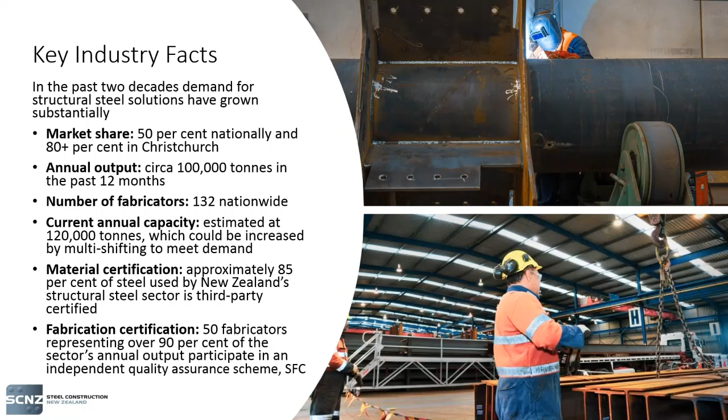We're also pleased to report that over 85% of the material supplied in New Zealand is third-party certified, so you have increased confidence that the steel put into a project meets the requirements of the standard. At this point, I'd just like to hand over to Alistair, who will be introducing the topic today and covering various aspects of it. So thank you, Alistair.

Well, thanks for the introduction, Kevin. Welcome everybody, hopefully we won't have any more technical glitches today. I'd like to begin by giving you a little bit of an outline of where we're going to go in the next 40 minutes or so. Firstly, by way of introduction, I want to answer the question: why are we proposing new material requirements for Category 3 members?

Then we'll talk about steels for seismic application, and what are some of the factors that impact the performance of steels for seismic applications. We'll then talk a little bit about the NZS 3404 material selection criteria for seismic applications. Really the heart of the presentation is the section on what we're proposing for Category 3 member material requirements, and we'll also touch on the technical basis.

So why do we think these are sound solutions, or appropriate, for Category 3 members? Then we'll talk a little bit about what are some of the implications of the requirements. If we do adopt them, what will be some of the benefits, and what are some of the next steps. The game plan for developing this draft paper is to make some changes to the NZS 3404 material selection provision, so what are some of the next steps on that journey?

What we're going to talk about today is based on a Steel Advisor article that we published recently. It's available from the SCNZ website, and hopefully most of you have had an opportunity to download the paper. I'll be giving a high-level overview of the paper and then really focusing on what we're proposing. If you want to see all the details of what's in the paper, then you'll have to go and read it.

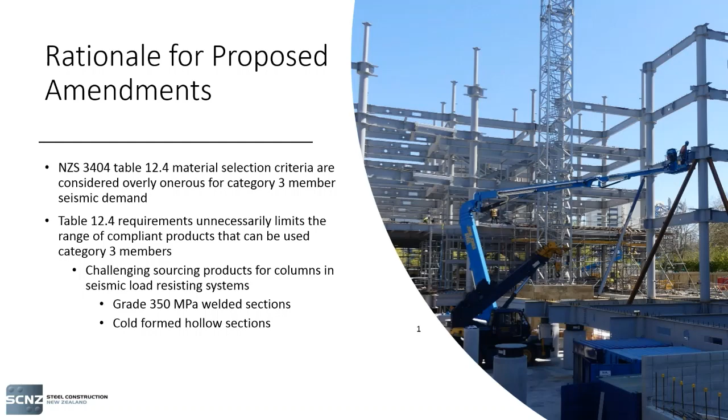What I'd like to do now is talk briefly about some of the factors that affect the performance of steel in seismic events. The Northridge and Kobe earthquakes in the 1990s exposed the fallacy that structural steel is an inherently fracture-resistant material. There were two types of fracture modes observed during those earthquakes.

Firstly, there was brittle fracture. To understand it, if we were to pull a test sample, put it in a tensile test machine, and plot stress versus strain, we can contrast brittle and ductile behaviour. With brittle type behaviour, once the steel reached its elastic limit, we would get very little plastic deformation before the material fractured.

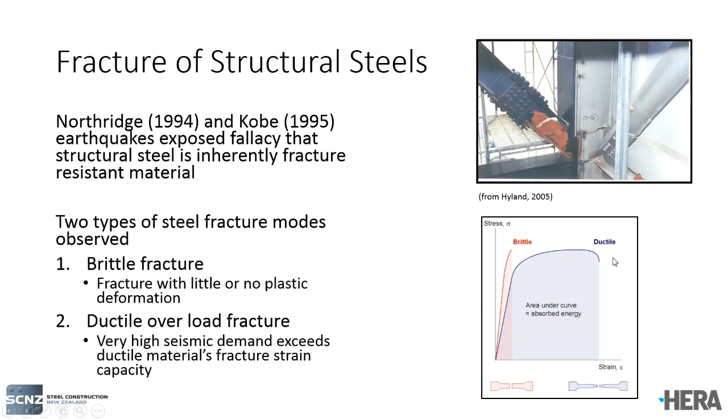In contrast, ductile behaviour means that once steel reaches its elastic limit, it transitions from elastic to plastic behaviour, with significant plastic deformation before the material eventually failed. The second fracture mode observed in those earthquakes was ductile overload fracture, which, as the name suggests, was actually very ductile. What happened was the seismic demand was so high that it exceeded the fracture strain capacity, so we ended up somewhere out here in the steel.

So what are some of the factors that contribute to the seismic performance of structural steels? The stress strain characteristics of the steel have a bearing on its performance, which we'll touch on in the next slide. The V-notch toughness of the steel also impacts its seismic performance, which we'll discuss in more depth later.

Other factors such as the presence of crack-like features in the steel can also affect seismic performance. Weld defects can introduce crack-like features, and you can get inclusions in steel that are rolled in during the rolling process.

Also, the loading parameters have an impact on the seismic performance of steel. The rate at which the structure is loaded has an impact on seismic performance, as does the number of cycles of inelastic demand.

Another factor that can contribute to the seismic performance of steel is the presence of triaxial restraints. If you have a very complex three-dimensional joint and the steel is essentially constrained from deforming, it will often end up behaving with a very limited ability to deform plastically.

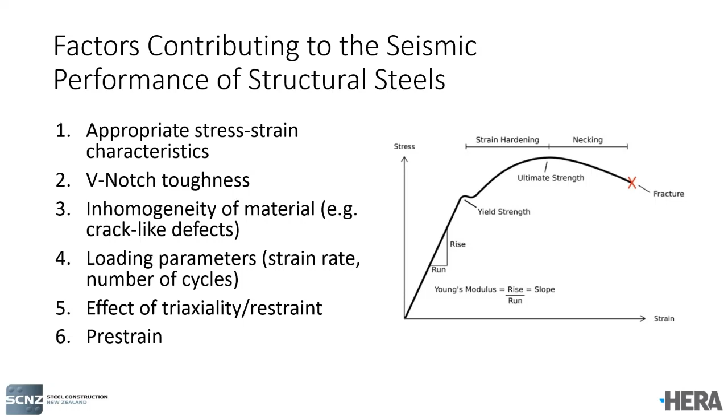Also, the presence of pre-strain in the steel can affect its seismic performance. If the structure has been through a previous moderate earthquake and the steel has been yielded, that will have an impact on its performance. The steel might have been pre-strained by fabrication processes, cold bent, or on site they may have had to force it to get it erected and into place, ending up yielding some of the steel.

So what are some of the stress strain characteristics of steels that contribute to good seismic performance? One key requirement, and a direct measure of the ductility of structural steel, is the elongation percentage at fracture value, derived from a tensile test.

The sample is then put into a tensile test machine, and we get this sort of behavior for structural steels. Once we start loading, we typically get elastic, recoverable deformation. We'll reach a yield point, then transition into plastic behavior where the steel continues to deform without additional stress. The steel then starts to strain harden, and eventually reaches the ultimate strength, the highest stress. Once we reach ultimate strength, the sample starts to neck down and eventually fractures. After the test is complete, the test sample is essentially put back together again.

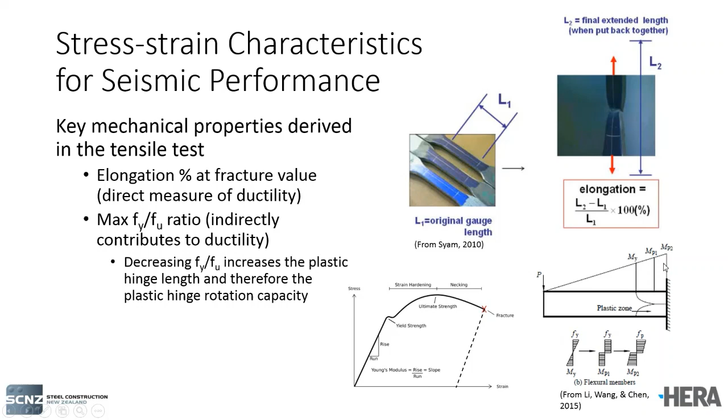All structural steels exhibit a change from ductile to brittle behavior as the temperature of the material drops. The Charpy V-notch impact test determines the amount of energy absorbed by a notched test sample during fracture.

The transition temperature is taken as the transition point between ductile behaviour of the steel and brittle behaviour, and it's typically defined as the temperature at which, if you were to test the sample, you would have 27 joules of energy absorbed. Above that transition point, it takes quite a bit of energy to break the sample. Once you get below that transition point, you require very little energy to break the test sample.

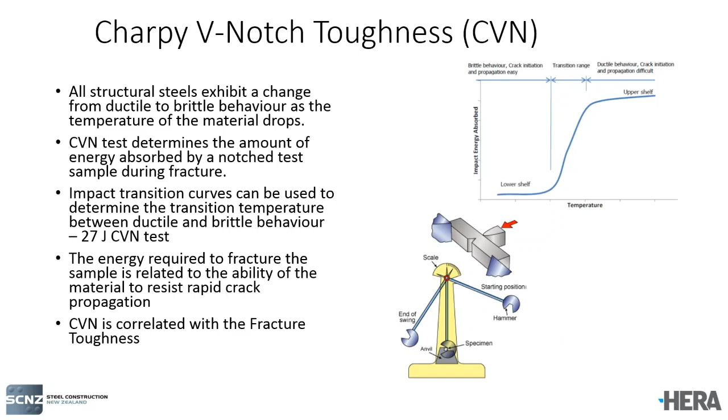So the energy required to fracture the sample is related to the ability of the material to resist rapid crack propagation or brittle fracture. And there are correlations that you can make between the Charpy impact energy and the fracture toughness of the material.

What I'd like to do now is talk briefly about the NZS 3404 material selection criteria for seismic applications. The NZS 3404 material provisions are intended to ensure that the grade of steel chosen can meet the expected inelastic demand, and that includes suppressing brittle fracture.

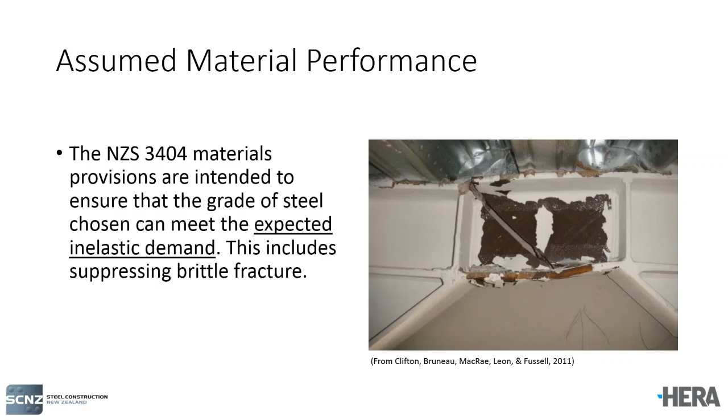So what is the expected seismic demand? NZS 3404 classifies seismic resisting systems into one of four categories based on the inelastic demand. There are three ductile systems: category 1, fully ductile with the highest inelastic demand, through to category 3, nominally ductile, which has very low inelastic demand, and then category 4, which are essentially elastically responding systems.

Members can also be categorized into primary or secondary members, depending on whether they are yielding elements or protected elements using capacity design. So in 3404, table 12.2.6 has a relationship between the structure category and the member category. This relationship is also a function of whether the member is a primary or secondary member and whether there's been capacity design.

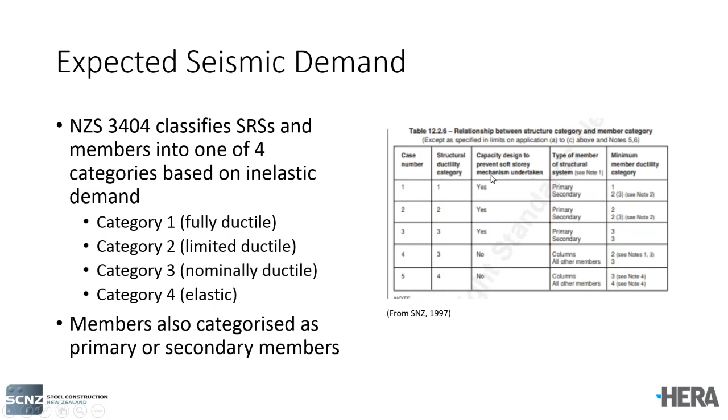Not surprisingly, the member seismic design demand is category dependent. So to illustrate the difference in demand between the categories, I have here an I section subject to flexural bending.

If we're talking about a category 4 member, which is essentially an elastically responding member, if we think about the moment curvature behavior of the steel section, we'd be talking about steels operating in this elastic portion up to the first yield of the section. At that point we have first yield, so the outer fibre of the steel has reached yield.

Category 3 members experience very low inelastic demand. They're subject to a strain of about 2 times the yield strain. So for category 3 members, we're now undergoing the transition from elastic to plastic behaviour. This is the sort of stress distribution we get for category 3 members.

Category 2 members have a fully plastic section, and the strain demand in the section would be in the order of about 10 times the yield strain.

Once we get to category 1 members, we are now seeing strain hardening, and we're getting strain demand in the order of about 24 times the yield.

So if we were to think about the flexural strain ratio between category 2 and category 3 members, it's very simple maths. It's a ratio of about 10 to 2, so it's 5 to 1. And for the category 1 members, it's about 12 to 1.

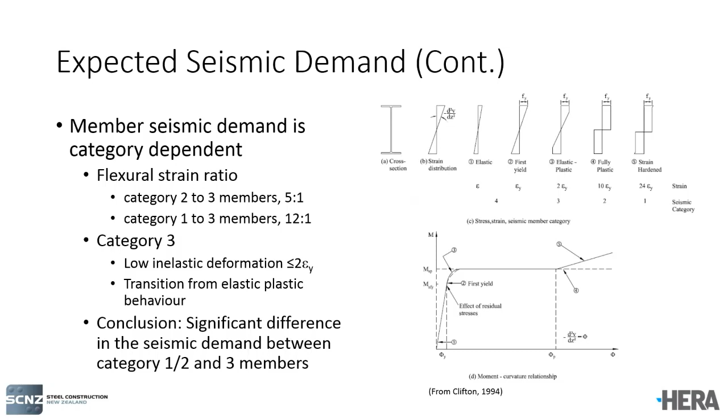In 2007, Amendment 2, there were new material selection for seismic application criteria introduced. These are found in Table 12.4, and they feature ductility requirements: a maximum Fy over Fu value of 0.8, a minimum percentage elongation at fracture of 25%, and also an upper limit on the maximum yield stress on the test certificate.

The reason for this is that we're trying to maintain the strength hierarchy that was assumed during the capacity design approach. So in 3404, there are some material overstrength factors which are based on material variability of historic steels. We want to make sure that the steels aren't too strong, that we invalidate the capacity design approach and end up actually yielding our columns rather than protecting them.

The Table 12.4 material requirements also include an impact toughness requirement: a 70 joule at 0 degrees requirement that was introduced, based on an average of 3 tests with a minimum of 50 joules at 0 degrees from a single test.

There is a limit of application for that 70 joule at 0 requirement. If you look at the notes under Table 12.4 in the fine print, it says the design service temperature must be at least 5 degrees Celsius or greater. Unfortunately, the standard doesn't say what to do if your design service temperature is below that. For example, you're in Queenstown, it's an external structure - you could be operating at -5, which could be your design service temperature.

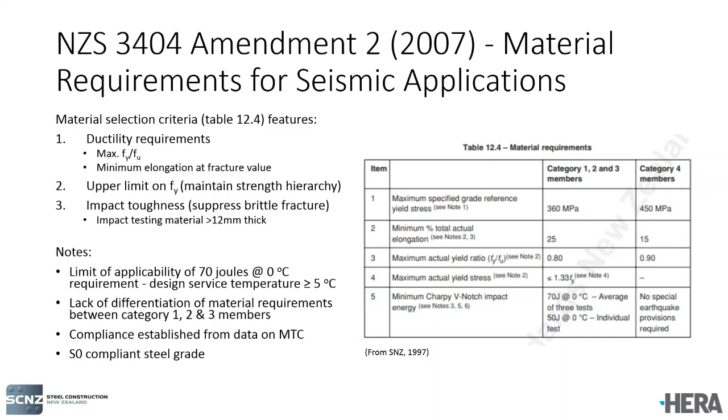The distributor essentially had to provide - what it came down to was the engineer had to find some steel from steel makers in the past that looked like it was going to comply. Once the steel was sourced and a material test certificate was supplied, you would be keeping your fingers crossed that it would come up and comply with these additional requirements of Table 12.4.

In NZS 3404, there are also limitations on the use of cold form hollow sections in seismic resisting systems. They are prohibited for Category 1 members, and in practice prohibited for Category 2 members. Somebody needs to demonstrate that they possess adequate ductility either by testing or rational design, so in practice cold form hollow sections have been used as Category 3 or Category 4 members.

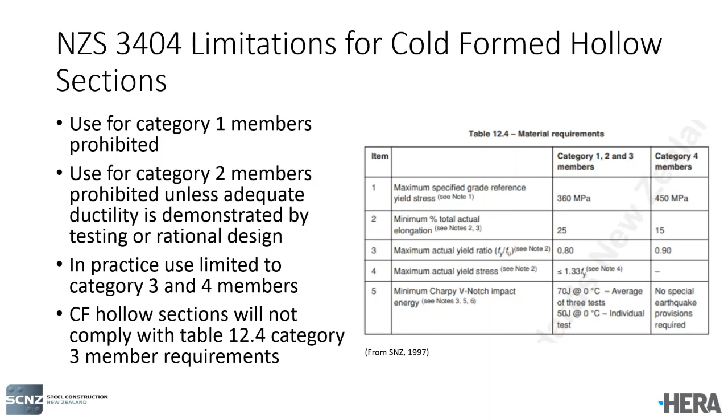Just as an aside, cold form hollow sections will not comply with Table 12.4, the Category 3 requirements from Amendment 2. They typically won't get them complying with this 0.8 requirement. The cold forming required to produce a hollow section will close up the gap between the Fy and Fu value. The other ductility parameter that you typically won't comply with is the 25% elongation value. They are commonly used for Category 3, but engineers have to use an alternative method for demonstrating compliance with the building code.

NZS 3404 Part 1 was published in 2009, just a little history lesson on the standard. At the time, the intention had been to break up NZS 3404 into 7 parts. The idea was that once all 7 parts had been published, they would all be cited as verification documents. Unfortunately, we never got past Part 1.

Part 1 addressed material selection. It included fabrication, erection, durability, and architecturally exposed steelwork. So it does represent the latest material requirements.

They used a slightly different approach for material selection criteria, a conforming steel type approach. So we can see here in Table 1, as long as you chose a Type 2 or Type 5 steel - which essentially was an L0 steel grade, either 250 or 300 MPa yield, or a grade 350 L0 steel or equivalent - that was all you needed to do.

You were not required to check any data from a material test certificate against Table 12.4. And the other point to note is that there was a differentiation of requirements between the category 1 and 2 member requirements and category 3. Category 1 and 2 required either a seismic grade of steel, which was a 2S grade, or an L15 steel, which was steel type 3 or 6.

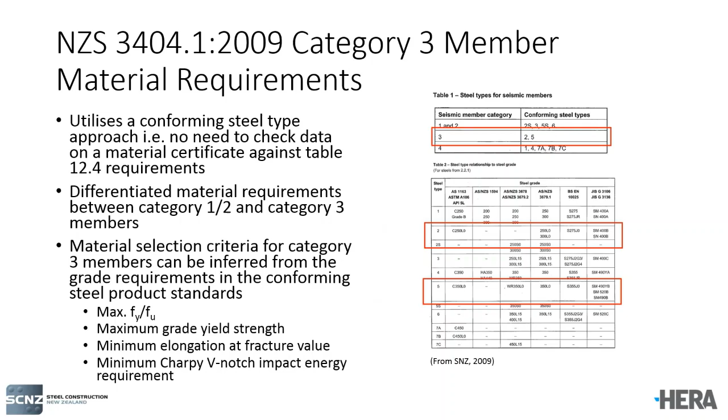This is really the key part of the presentation now. What I'd like to do is give you an overview of what we're proposing for category 3 member material requirements.

We've separated these requirements into ductility and impact toughness requirements. The ductility requirements have been presented in tabulated form. In terms of the maximum specified grade yield strength, we've stayed with what's currently in Amendment 2 for Category 3, which is 360 MPa, equivalent essentially to a grade 350 steel.

The minimum elongation at fracture has been reduced from 25% to 15%, and we have a minimum FU over FY ratio value of 1.2. The current requirements have FY over FU, so we've essentially flipped the ratio on its head. We have two requirements: one is if you're determining the FU over FY ratio from the minimum grade requirements of the product standard, that minimum ratio is 1.2.

We have a bracketed value of 1.1, and that's saying if you determine the FU over FY ratio from the actual data on a test certificate - so if you pull off the yield and ultimate tensile strength from a test certificate and compute that number - you can have a slightly reduced value of 1.1. There's also the impact toughness requirements.

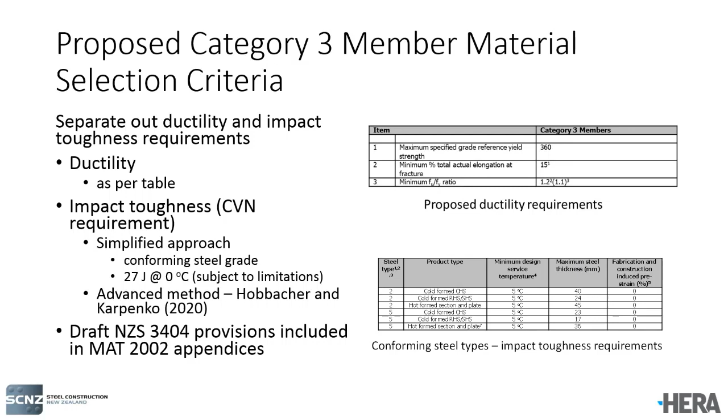There are two options in our provisions for establishing compliance with the ductility requirements. We have followed a conforming steel type approach, which is what NZS 3404 Part 1 2009 adopted. So we have a list of steel types that are conforming steel types. You will note we have some exclusions for Type 2 and Type 5 steels, for cold formed hollow sections to AS/NZS 1163 SHS and RHS sections.

The reason we have excluded them from the conforming steel type is that if you go to the product standard for 1163, for SHS and RHS sections, the minimum elongation at fracture value is only 12%, which is lower than the 15%.

If you want to use an SHS or RHS section, that's not a problem. There's an alternative path you can follow. You can also demonstrate compliance with the ductility requirements by getting a test certificate and comparing it against the requirements we're proposing. So there's a separate pathway for such elements or product types.

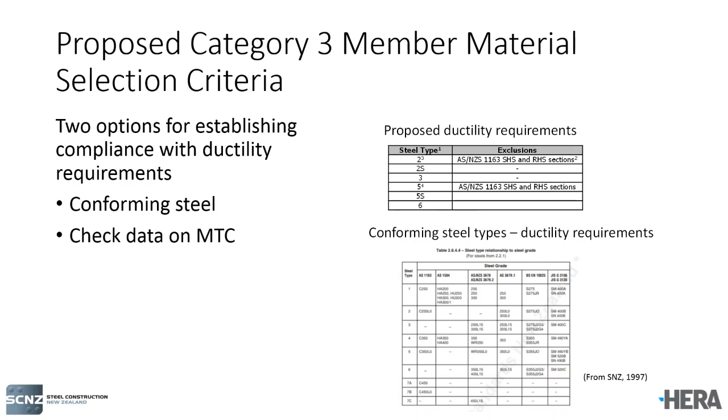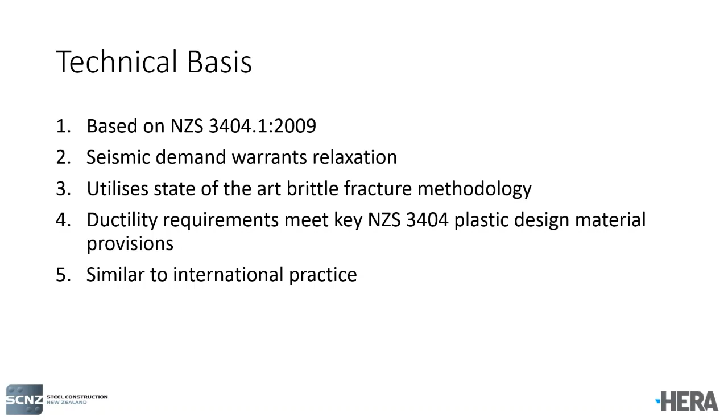So what is the technical basis? I'd like to touch on five reasons, or five arguments, for why we think these are sound material requirements or fit for purpose.

The first justification is that we based it on NZS 3404 Part 1 2009. As we've said before, this represents the latest requirements in terms of NZS 3404, even though, as I said, it was subsequently never cited. It went through a full standards committee process. What we have done is infer mechanical properties from the conforming steel types and used that as a basis for the values we've proposed for ductility.

You can see here we included this in our paper. We went through the Type 2, Type 5 steels from NZS 3404 Part 1 2009, and for the various grades we noted the yield values and the ultimate tensile minimum values. We determined what the FU over FY ratio was for all of these grades. We noted the minimum elongation at fracture values and also the minimum Charpy value.

If you look at the ductility requirements, here I've tabulated them to compare. This is the maximum specified grade, reference grade. If you go through the list of all the conforming steel grades, 365 MPa was the maximum, for a Japanese steel grade, SM 520B or 490YB, at 365.

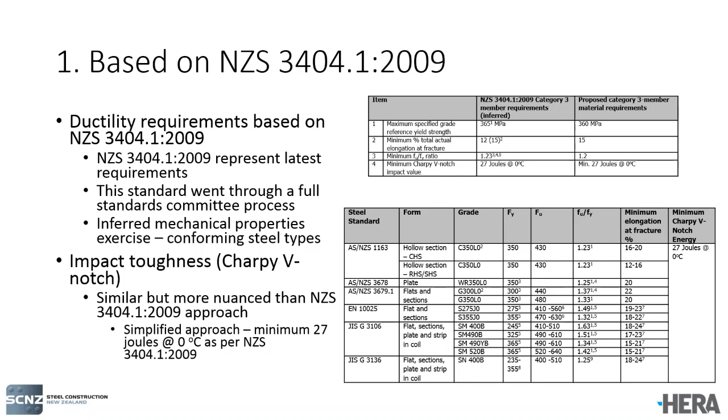Second justification is that the seismic demand warrants relaxation of the requirements. As we previously talked about, if you compare the category 3 member demand, thinking of a flexural member, to a category 1 and category 2 member, the ratio was 12 to 1 for category 1 to 3, and 5 to 1 for category 2 and 3 members. So what we're saying is the seismic demand warrants some relaxation, a differentiation of requirements.

This is consistent with the work of other researchers, so you'll have to take my word for it. If you want to find out more about the work of Kuwamura, Hobbacher and Karpenko, I suggest you read the paper. They suggested requirements based on the seismic demand.

If you think about the remainder of the NZS 3404 seismic provisions, there's also differentiation in terms of requirements between the various categories. If we think about section geometry requirements, we have requirements for category 1 members, category 2 members, category 3 members, category 4 members.

If you think about the requirements in terms of connection design, the requirements vary for the different categories. If you're doing your capacity design and thinking about your overstrength factors, they're dependent on the category type. Also, if you think about the NZS 3404 material revisions for seismic applications, prior to Amendment 2 they differentiated between Category 1, 2 and 3 members, and post Amendment 2, in NZS 3404 Part 1 2009, there was differentiation of material requirements.

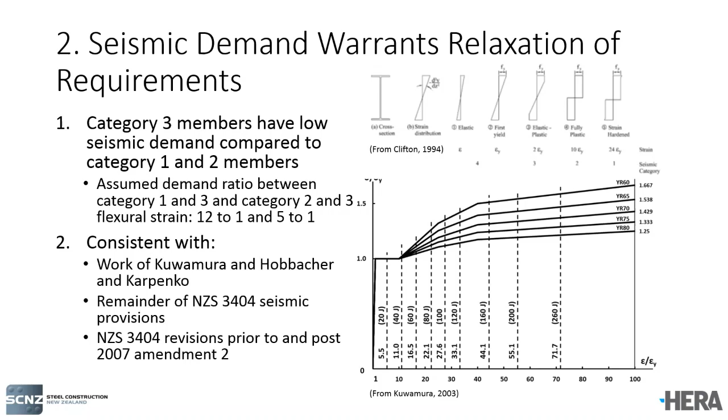The third justification is that we are utilising a state-of-the-art material selection methodology to avoid brittle fracture, and I'm going to hand you over now to Dr. Michail Karpenko, who's the Hera Welding Centre General Manager.

Good day everyone, and thanks for the introduction, Alistair and Kevin, and also thanks for raising expectations by calling this groundbreaking research. In this case, it would be more appropriate to talk about adoption of the best international practice with some modifications. So in this part of the presentation we will talk about

material selection requirements that were published in actually two papers. The first paper was published last year, done under the scientific guidance of Professor Hobbacher, a German expert on fatigue design and brittle fracture. The co-authors for this paper were Dr. Stephen Hicks, Professor Brian Uy of the University of Sydney, Patrick Schneider, who was a master's student at Hera doing some of that research for half a year, and myself.

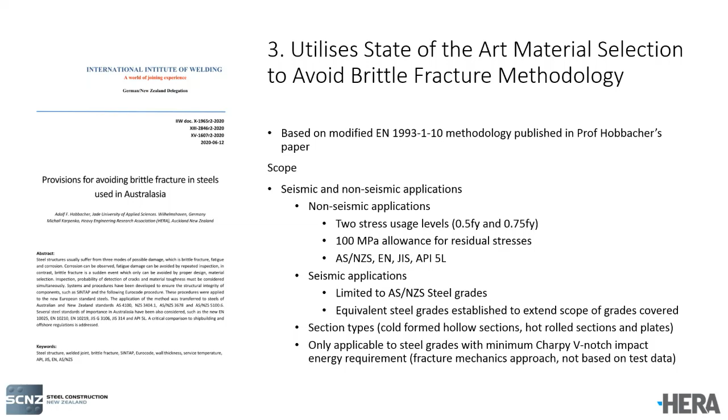Right, why do we need new material selection requirements? Because there are some limitations in the NZS 3404 material selection procedure. Some of the limitations are in NZS 3404 Table 12.4: it limits design service temperature for seismic applications to greater than or equal to 5C.

So at lower temperatures, theoretically, L0 steels cannot be used. The minimum design service temperature for non-seismic applications is limited to -40. It appears to be quite low, but if you need to correct the temperature because of strain hardening, then the temperature is actually higher, and for thicker plates the requirements are quite limiting.

The requirements don't include overseas steels like Japanese and European steels - they're not applicable theoretically to those steels. They may also not be fully applicable to AS/NZS steels manufactured overseas because they're based on test data from steel manufactured in Australia in the 1960s and 70s, so there may be some limitations we don't understand. They also don't account for strain hardening in hollow sections.

They don't account for stress utilization - how much of the service load the structure receives. They don't account for any fabrication-related defects like undetected cracks, and they do not differentiate between materials of different yield strength, for example 250 MPa or 300 MPa.

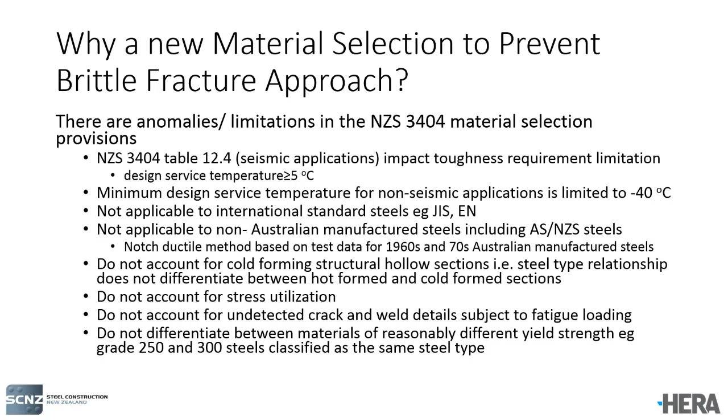Right, these issues can be addressed by applying the approach of the Eurocode - Eurocode 3, also EN 1993 Part 1-10. We call it Eurocode 3 for simplicity. Eurocode 3 is based on the so-called SINTAP procedure, and this procedure includes elements of the R6 defect assessment procedure, so it's quite a complex procedure. R6 was first developed in 1976

in the UK, and it was designed mainly for applications in the nuclear, pressure, and piping industry. It includes the concept of the so-called failure assessment diagram, FAD, and it has had a major influence on related design standards. The most famous one is probably BS 7910 fracture mechanics standard, and also the SINTAP procedure itself.

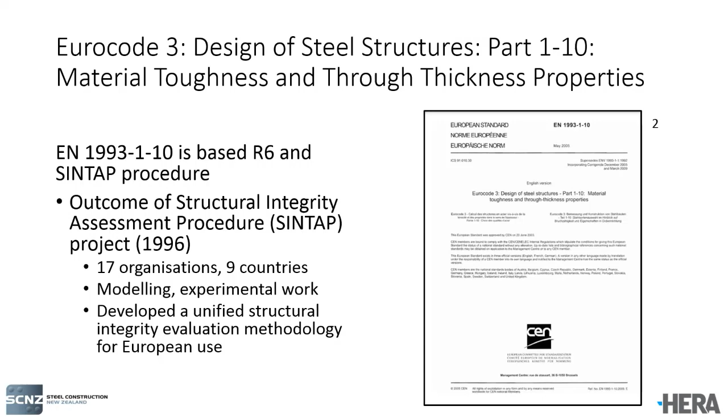The SINTAP procedure was developed in Europe in order to align requirements related to the assessment of steel structures in the European Union. The project involved cooperation of some 17 organizations from 9 countries, and it was completed in 1999. So it was the basis for the Eurocode. Next slide, please, Alistair.

The Eurocode 3 Part 1 Part 10 provides a table. This is a part of the table on your right side. The table includes so-called admissible plate thickness for European steels. It is not applicable for other steels, applicable for European steels only.

Some of the parameters considered in this table are tensile and notch toughness values of the steel, lowest air temperature for that application, and utilization rate. It means the actual service load as a percentage of yield strength of the steel, which can be 0.75, 0.5, or 0.25 FY. The strain rate effect, for example by accidental impact loading, the effect of cold forming can be considered, and an additional safety factor can also be considered as a temperature shift.

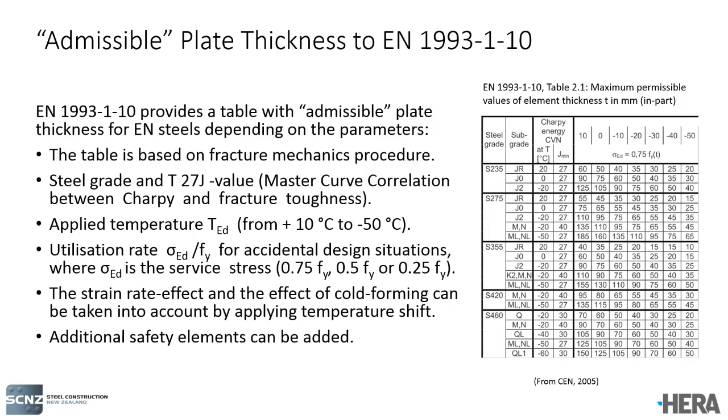However, the Eurocode 3 has also some limitations for New Zealand applications. Most notably, it is applicable to steels manufactured in the European Union, or under European standards like EN 10025 and so on. It does not include recommendations for steel subject to seismic actions. It can be applied, but it is a little bit weak on that. It is too conservative for cold-formed hollow sections, so it leads to some conservative results, and there are some new recommendations that help to enhance it or make it less conservative.

And the minimum temperature included in the table is limited to -50, and we experience some limitations with that. It needs to be extended, because if you introduce a temperature shift due to seismic actions, the actual temperature in the table needs to be lower to allow for the shift.

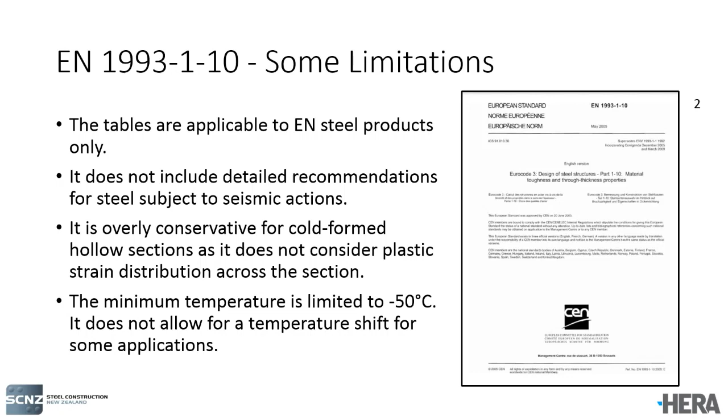What has been done? We looked at the Eurocode, and I have to mention Professor Hobbacher, who was the scientific brain behind it. The main modification to the Eurocode approach was the introduction of three verification models identified as VM1, 2, and 3.

Those models are applicable for seismic applications, for seismic actions. Verification model 1 is the lower seismic demand. Let's say it includes residual loadings and service loadings up to the yield point of the material.

Verification model 2 includes a minimum strain of 1%. The steel goes into yielding at this stage, with a load of 1.35 times the yield point. So basically in model 2 we account for the overstrength of the steel to account for any material variability. This is an overstrength factor.

And verification model 3 considers major plastic deformation in the steel of 10%.

In terms of the relationship between verification models and seismic member categories, verification model 1 is recommended for member category 4, verification model 2 for category 3, and category 1 or 2 should be dealt with using verification model 3.

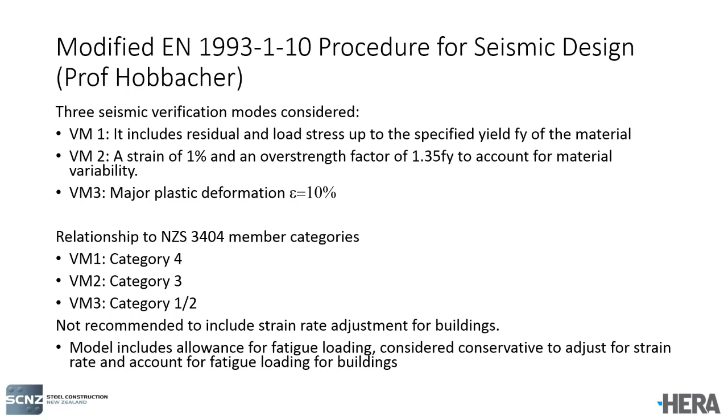What are the key features of this methodology? A further difference between Eurocode 3 and NZS 3404 is that Eurocode considers a real welded detail, while 3404 is silent on what it is - is it steel, is it welded? It's not welded, but in reality everything is welded, or most of the steel is welded. So Eurocode represents a real case.

This real case is represented by a so-called reference detail. The reference detail selected in this case is a non-load bearing attachment, shown on the right side. The reason for selecting this detail is because its stress concentration factor accurately represents a range of standard structural details, for example a beam to end plate connection. The stress concentration at the weld toe is very similar to this detail, so this detail is used in the modeling.

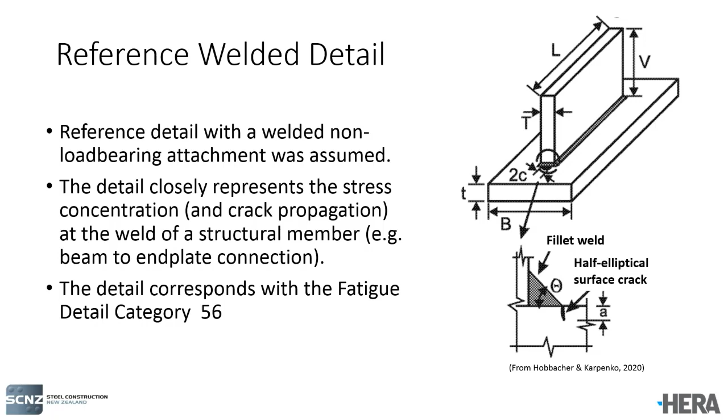This detail also represents a fatigue detail category of 56. If you look at the back of standards like 5100 Part 6 bridge design or 3404, you have structural details - this is fatigue detail category 56. Now in this detail, we assume the existence of a crack at the end of the weld, a little crack. Next slide, Alistair.

The reason for this crack is we don't want any crack, but crack is a real possibility in any welded structure, and we have to assume that crack gets undetected by NDT. The size of undetected crack is a function of the plate thickness. If we do cross comparison with the initial crack size A0, we need to make sure it is actually detectable using NDT. We can include larger cracks if needed, but these are crack sizes we're confident can be detected.

Now this crack will grow. 500,000 fatigue cycles at 56 megapascal stress range, this nominal stress range measured in the plate, is applied to this crack, so it will propagate. The reason for propagating the crack is to get closer to reality — the crack is undetectable, but the structure is loaded. It may have been loaded due to a seismic event or high cycle fatigue, and we missed the crack propagation period. So crack propagation is considered by applying 500,000 cycles to this plate, and the crack will grow to its final size.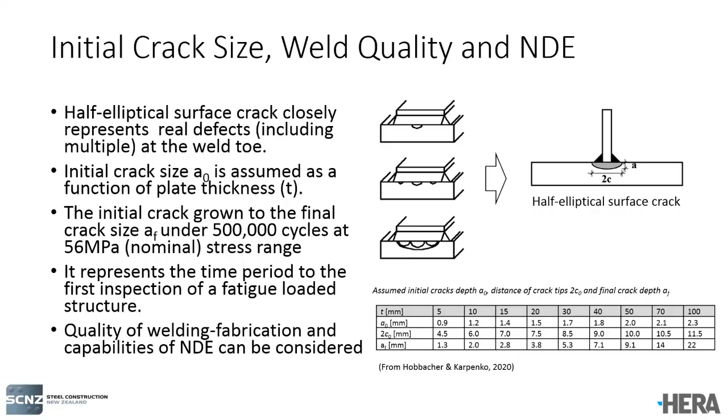We first looked at the possibility of developing these requirements in 2017, and developed the first draft on a commercial basis for Antarctica, New Zealand that year. We realized that NZS 3404 standard cannot be used because it only goes down to -40, and Eurocode cannot be used because it's limited to -50. So we extended the requirements, or extended the tables, to -120°C.

This extension allowed us to apply a temperature shift, so we can account for seismic events, strain hardening, and other conditions. The recommendations are summarized in the current paper referenced in this presentation, and also in the background papers — I'll be happy to share it with you. That brings us to the end of my part of the presentation. Now it's back to you, Alistair.

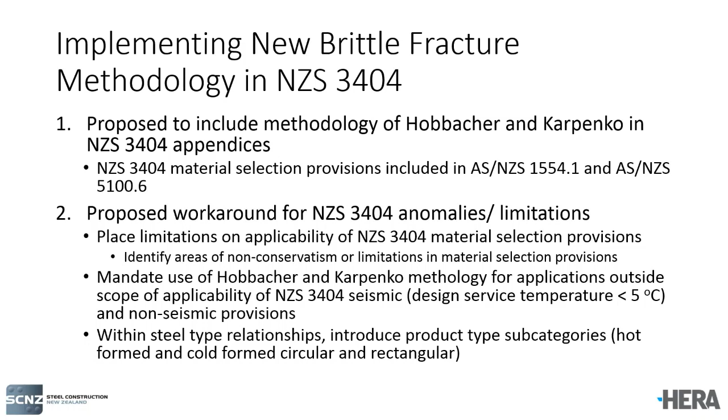What we also intend to do, within the steel type relationship, is introduce some product type subcategories. As mentioned before, the effect of cold forming of hollow sections impacts material selection requirements, and currently category 2 and category 5 sections, which lump cold form sections in with hot form sections, don't differentiate between requirements for those types of sections.

The fourth justification for what we're proposing is that the ductility requirements will meet the key NZS 3404 plastic design material provision. Looking at the inelastic demand for plastic hinges and plastically designed members, they would be pretty similar to a category 2 member — the demand ratio between category 2 and category 3 members was about 5:1. We do recognize there's a different type of loading: plastic design is more monotonic, whereas it's cyclic loading for an earthquake, but we think it's a reasonable comparison to make.

If you put side by side the plastic design requirements for ductility and compare them to what we're proposing, they're pretty much identical. In the plastic design requirements, there's a minimum yield length, plateau length requirement. It's not a very practical one — nobody ever supplies a test certificate with yield length. What's actually more relevant is the minimum elongation at fracture value, and we've included requirements for that. If you compare the minimum elongation at fracture requirements for plastically designed members, it's 15%, so we're proposing something that's absolutely identical.

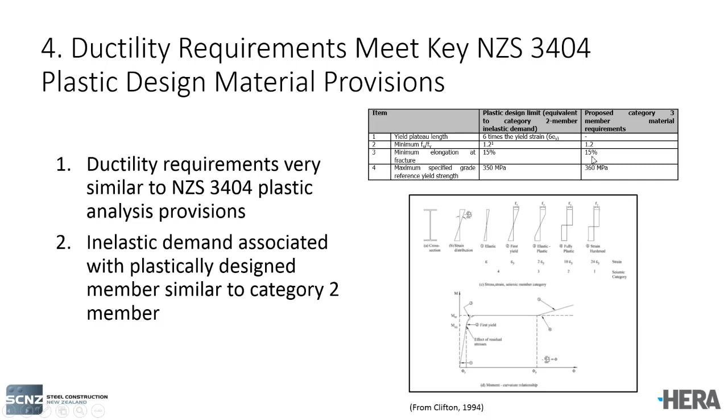If you look at the minimum FU over FY value, 1.2, we're following suit with that. There's a maximum specified grade reference yield strength of 350 MPa. We're proposing 360. So if you look at it, for all intents and purposes, it's pretty identical.

The fifth justification is that it's similar to international practice. We're saying it would meet or exceed US, Canadian, European material provisions for all categories of ductile seismic resisting system. There are some Japanese material requirements for high seismic demand welded structures that would be more onerous. You'll have to take my word for it today that we're correct in saying this. We've addressed this in some length in our paper, so if you want to go into the appendices, if you've got time on your hands and want to do some light reading, feel free to go have a look at the requirements of other standards.

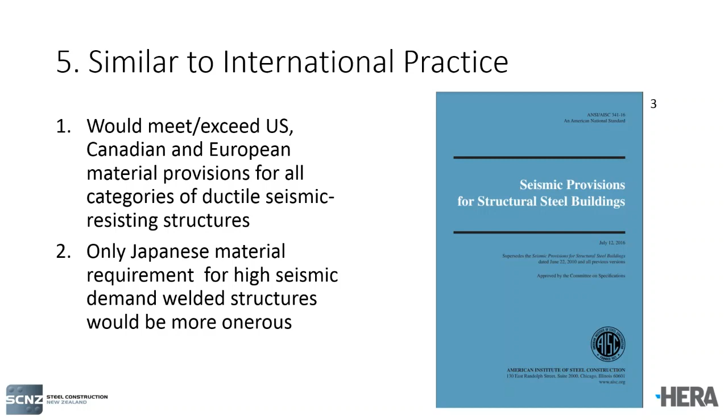So what would be some of the implications if we adopted what we're proposing for category 3 member requirements? I think there are two key benefits. One is that we will simplify sourcing requirements, because we will align the seismic material requirements to a range of non-seismic steel grades. So there will be no requirement to look at a test certificate and compare it to additional, often higher, more onerous requirements. As I said before, it's a bit like playing Russian roulette — you order the steel, you get the test certificates later, and you hope that it complies. Well, we're going to eliminate that problem.

We will also open up a greater range of compliant steels. Even though there is now a seismic grade of steel, there's still only limited supply — very few steel mills in the world make it. It's limited to grade 300 plate and hot rolled sections, and of the hot rolled sections, it will be UBs and UC sections. You won't get angles, you won't get PFC sections in seismic grade, you won't find any hollow sections that comply, and you won't source 350 grade plate for welded sections. So if we adopt these requirements, we should open up a lot more options for compliant steels for category 3 members.

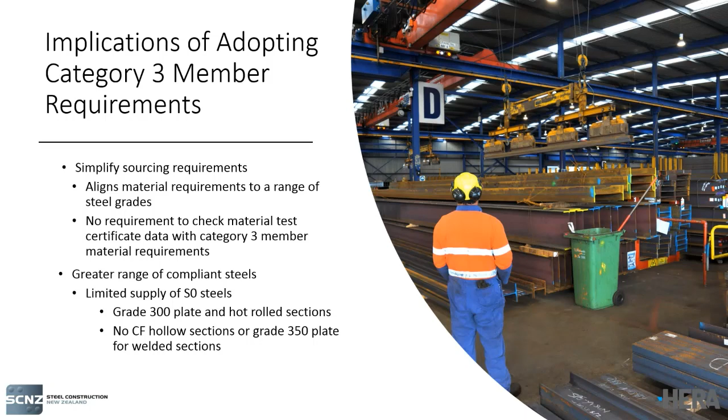So what are the next steps? As I mentioned at the outset, our goal in preparing this paper was to make some changes to the NZS 3404 material selection requirements for category 3. So you could say we've undertaken step 1, which is really to prepare a draft paper that provides the technical basis for the changes. What we're currently undertaking is a stakeholder consultation process. So we'd love it if you could download a copy of that paper, find some time in the next month or so, and give us some feedback. We're inviting feedback by Friday, 20th of November.

Then what we're proposing is to submit the provisions in the paper to the NZS 3404 Standards Committee for consideration. The good news is that after about 12 or 13 years, the NZS 3404 Standards Committee has been reconvened, which is good news, so it's very timely. Once again, we welcome your feedback.